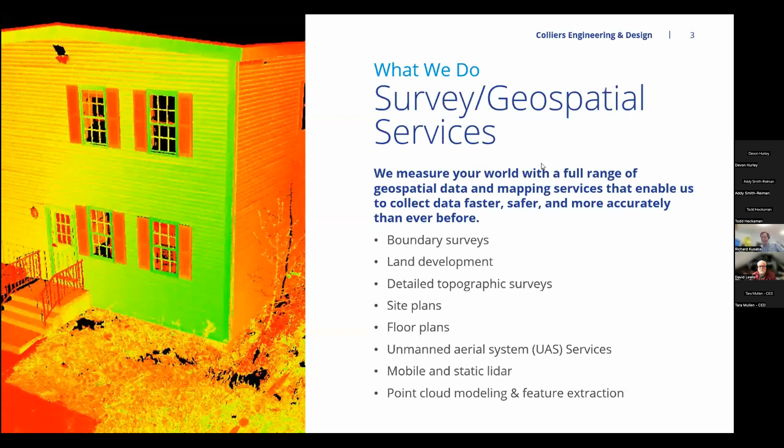We're all surveyors and we have a good understanding of boundary law and survey control, but it goes a little bit beyond the flat two-dimensional plans now, and goes a little bit more out.

Our survey approach uses pretty much every tool, and if there's a complicated spatial problem, we like those. We like to see what tool can we use for what job, and also what is an appropriate deliverable for you for this job?

Sometimes the best deliverable is a more simple plan, and sometimes the best deliverable is a much more complicated result, maybe a rendering, something like that. So we use all the tools to help our clients get where they need to go.

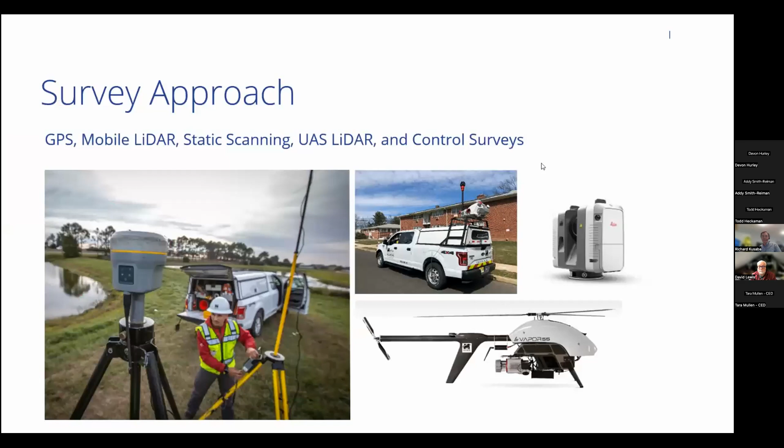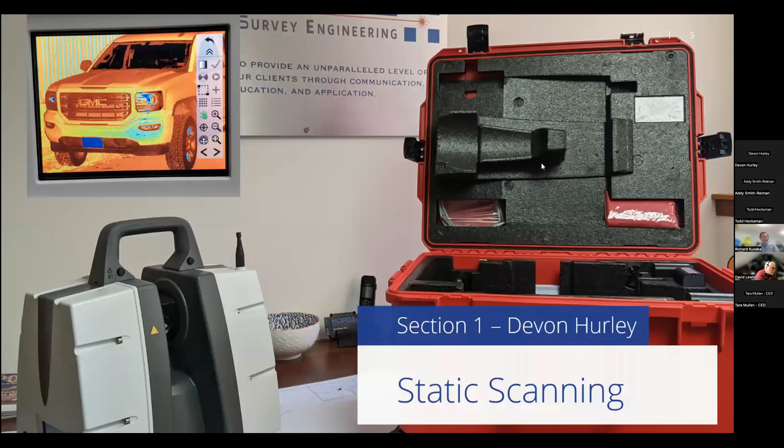The first thing we're going to talk about is static scanning, and I'm going to stop sharing. A coworker of mine, Devon Hurley, is going to take over and talk a little bit about static scanning and show the data from the brewery. So I will stop sharing.

Devon, I'm going to go ahead and mute myself because we sit next to each other. Gotcha, I'm going to try to share my screen here.

Can everybody see that? This is a blank screen right now, but... Yes. I was going to pull up what we did. Okay, yep, we can see it. Thanks.

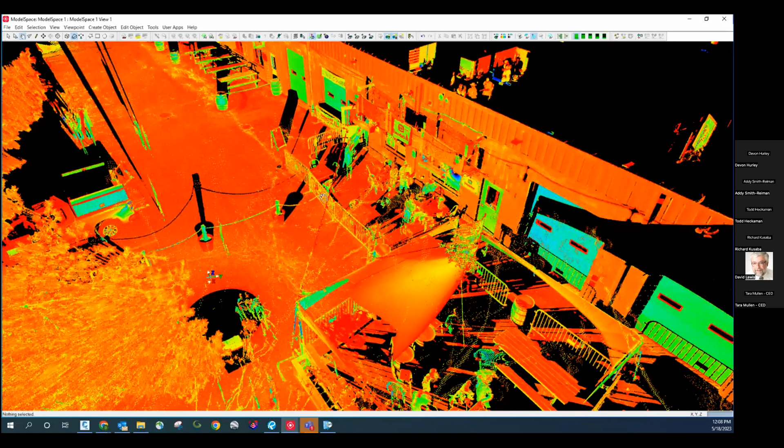Cool, yeah, so this was the first scan that we did, which was just of the exterior of the brewery. I just did it from one setup, but wanted to give you guys an idea of the level of detail that we're able to get from these things. You can see, obviously you can make out that text, but really the face of the building, you can see the grooves in every one of the, not really bricks, but whatever you'd call the face of that building.

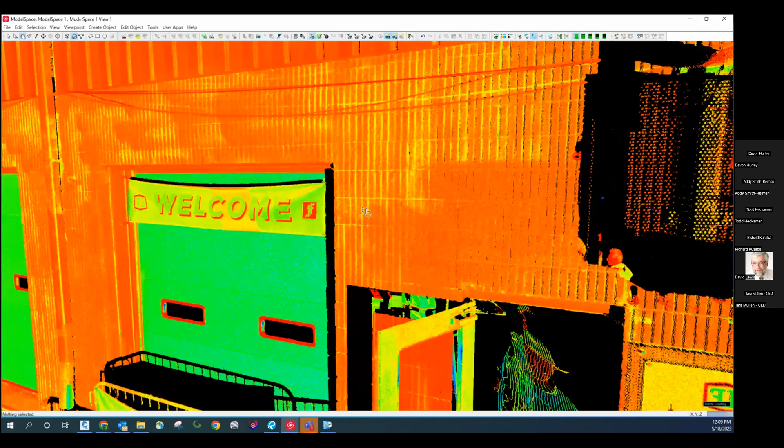I had this cranked up to about 50% of what we're capable of with it, so we can get as much detail as you would ever need. In most situations, we end up dumbing down the point cloud to get an average spacing of about 1/10 of a foot, just to make it more manageable from a data perspective. But that's basically a picture in terms of the amount of detail you get from it.

The door was open, so you can see where people were drinking beer at the bar and stuff.

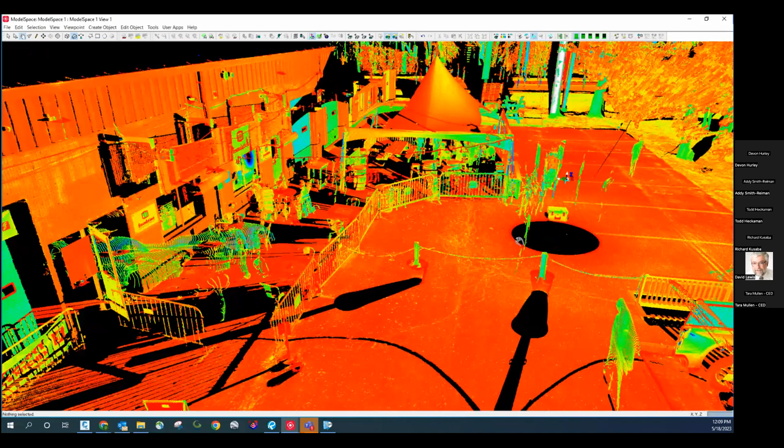A lot of times we take this point cloud and try to extract it using Revit models or whatever, basically to take the face of the building—extract the face of the building from the point cloud and things like that. As an example, I just took this tree. You can create a cylinder from it, so now you're actually creating this object three-dimensionally.

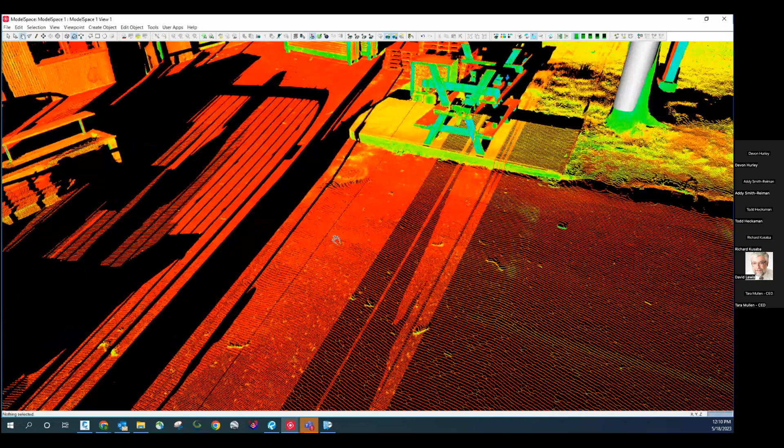Just to show you what we have to do—this was just one scan, but in general we do multiple scans, and we basically have to stitch them all together.

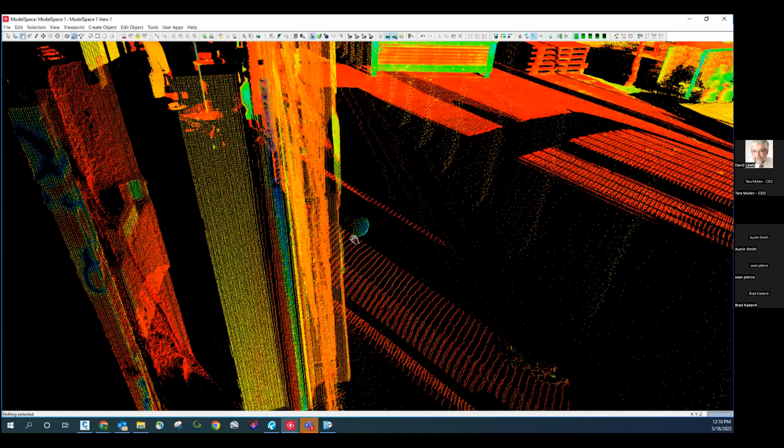The way we do that is you have to have common targets that are visible from all the different scans. Just a fun fact, this is actually a sphere, and we know exactly what the radius is, so the system automatically picks that up and knows that's a target. It just has a magnet on the side, so I attach it to the building right there. There's a few of them that I placed around, including this one down here.

So that's kind of the deal from this scan. And something else you can do that's kind of cool...

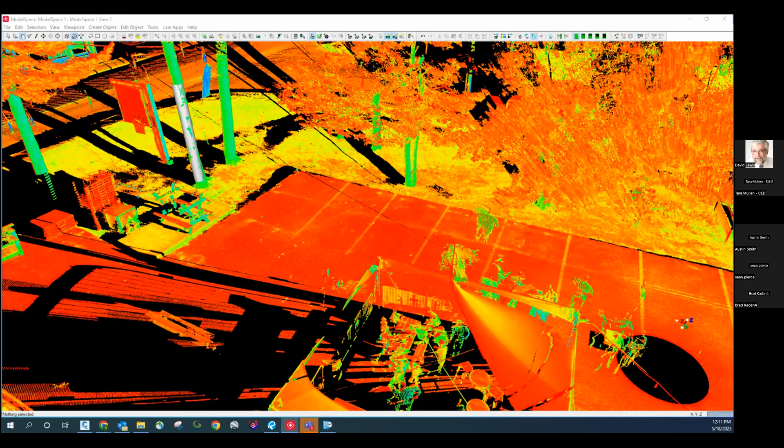You can change the way that you view the object, the point cloud. I'd forgotten to take pictures with this one when we did it, but you can change the view—the colors are based on the intensity of the return.

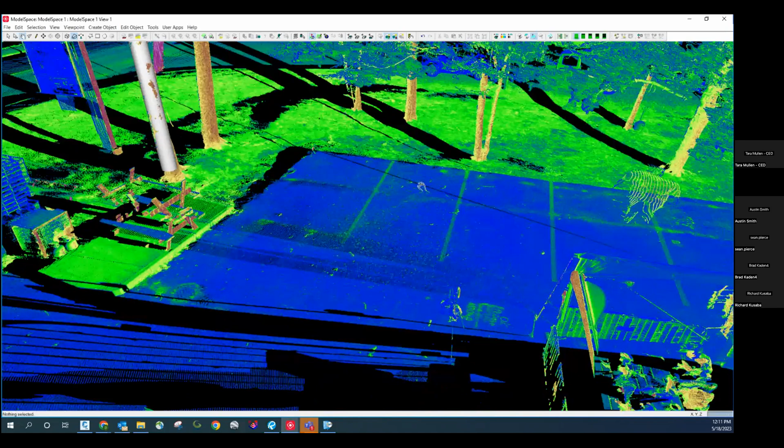It really gives you an idea—the different colors reflect differently. You can see the grass looks a certain way, and you can make out those pavement paint lines. You can see somebody had painted something over here. That just kind of gives you an idea.

And then we scanned the group instead of taking a picture. We scanned everybody in, and Logan started over here, then while I was scanning he ran to the other side, so he's in there twice. But yeah, just kind of a cool thing.

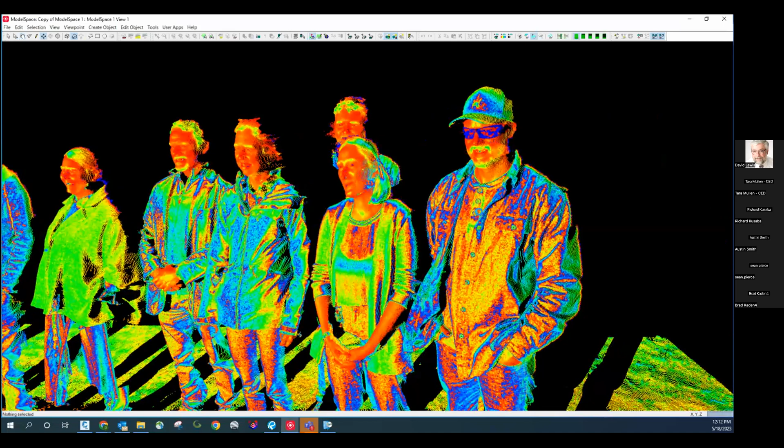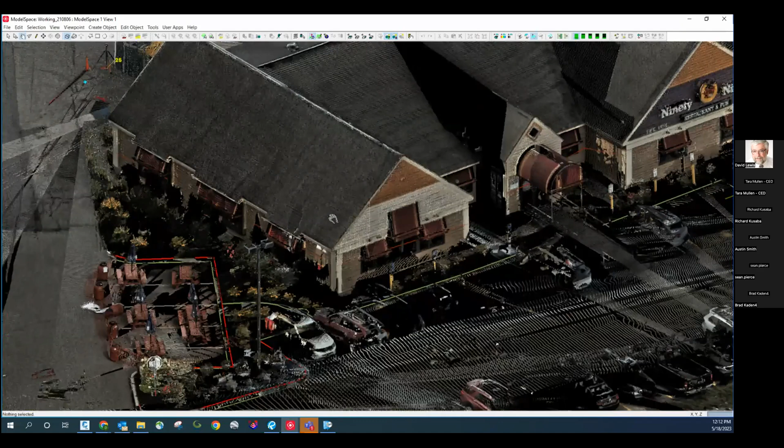Pretty cool stuff. Since I forgot to take pictures, I figured I could grab another scan job that we did, so you can see what it looks like. We scanned the 99 in Augusta, and we took full pictures with all this, so you can actually make out exactly what everything looks like on the site.

Again, the purpose of what we were doing here was the exterior existing condition survey, but normally this isn't something we'd care about—all this data is in here, and the level of detail we have is pretty impressive.

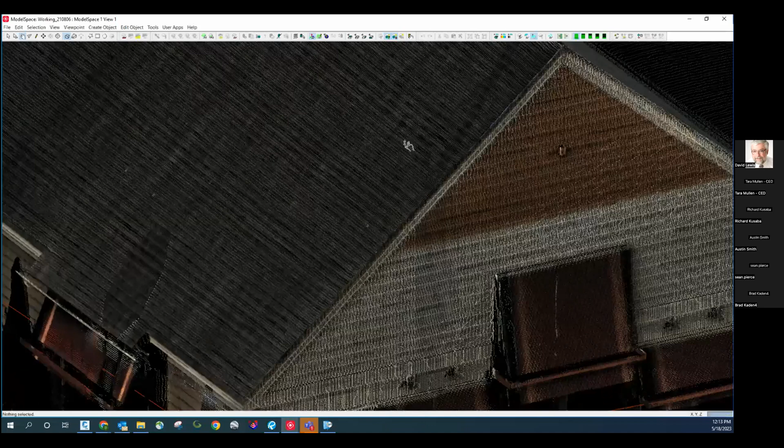And the shared parking lot with the hotel—again, this was not what we were doing, but just because we scanned it, you can see everything.

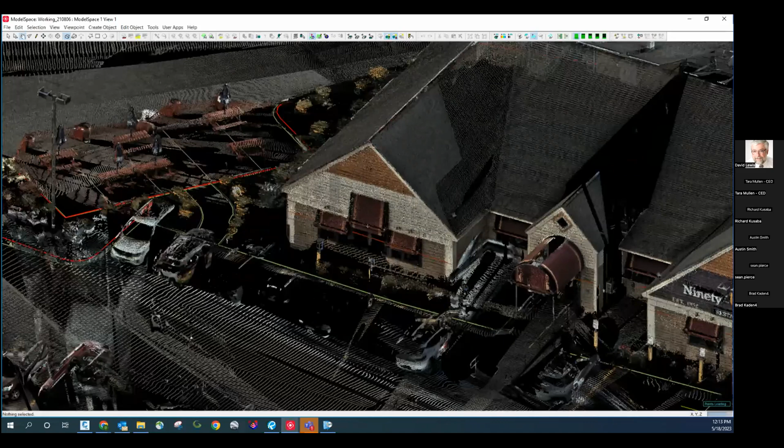Yeah, that's kind of the examples that I have. I'll probably stop sharing now unless anybody has any questions.

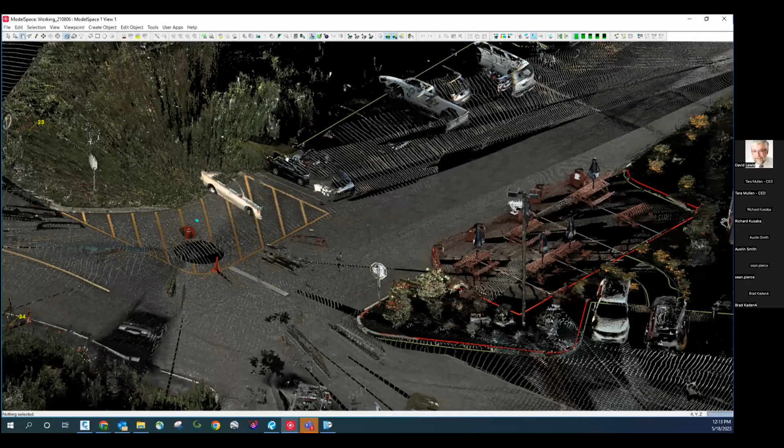Okay, so I wanted to show some before and after. That's just the raw data. We process it, do the survey control, show the targets from every position, and I just wanted to show an example of what it looks like after it gets modeled.

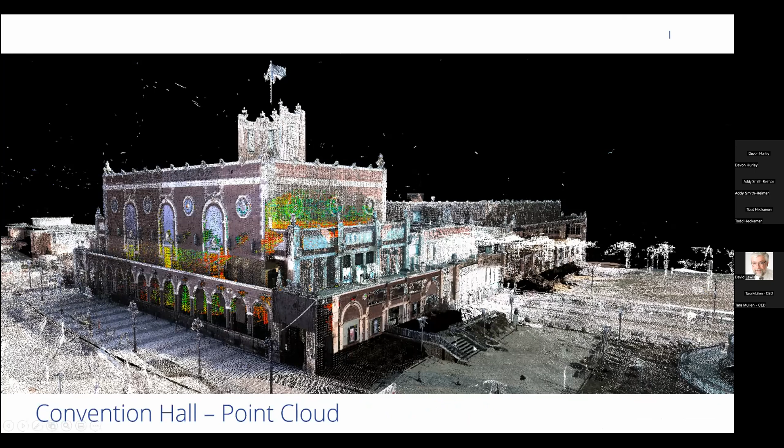So this is another project our company did. This is a photo of the exterior of the building. This is the colorized point cloud. You can see this one was done with intensity return, which is like the bright colors, and each pixel gets a photo or color assigned to it. Then this is what it looks like as it's been modeled. So you can see that's a photo of the front, the raw point cloud, and then the model.

How detailed the model is comes down to the level of detail for the scope of modeling. Because the more you model, the more you add. So that is kind of a simpler model, but it does show the level of detail. I think it's cool to see it go from photo to point cloud to model.

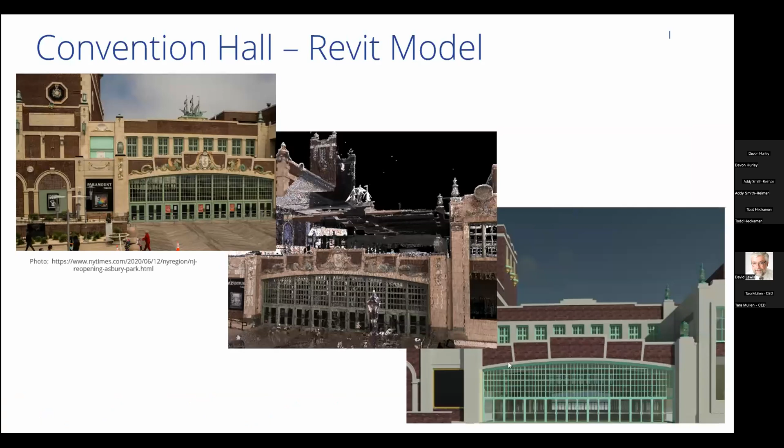Next, Richard Kusaba from our office is going to talk about the UAV aspect of it. So I'm going to stop sharing and let him jump on.

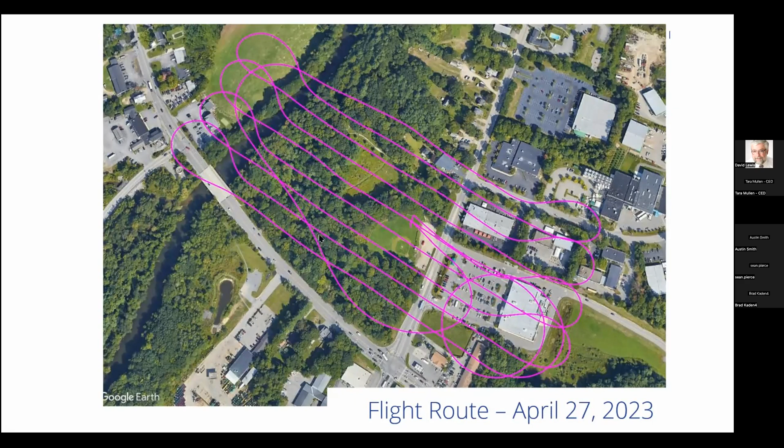For those who were there, that was a very quick flight, and they took care of it. So while you were there, you got to see both the terrestrial data that we were able to collect - very, very detailed stuff at the building level, at the interpersonal level - and we can also grab data from up above on a broad scale. Even on that broad scale, we still get some three-dimensional because we have our oblique photos. So yeah, it's a matter of using the right tool for the right job, and we have a full tool chest to work with.

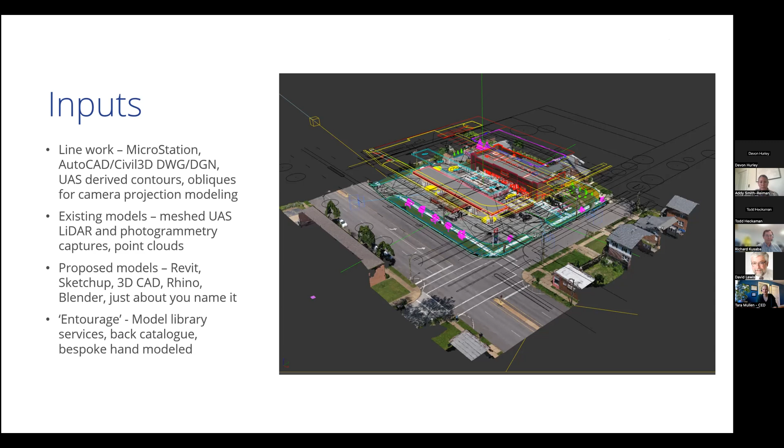PhotoSims is a really large part of some of the stuff that I do, especially more recently too. So you can consider them before-and-after, comparing photographed and proposed states, with precision still or video camera matching, ground or air. You're saying here's an existing state, here's the proposed state over the exact same camera properties, so that it appears to sit right on top of the photo. You barely have to describe what it is - you can just look at it and see what it is basically.

A lot of approvals are based on this - the town board, the neighbors are concerned about a project, they want to see what it's going to look like across their driveway in a lot of cases. It's kind of a high fidelity mixed reality. If you think of augmented reality, like the HoloLens, you look through this kind of goggle and overlay 3D onto that. This is almost like that, only we're in a single still frame, one single photo for one single specific place, but you can get a nice high fidelity out of it.

I should probably get that out of the way. Sorry if that was distracting, guys.

So then looking at some of these examples, up here we've got a Circle K that was getting demolished and replaced entirely. So there's that existing photo, and then the proposed is the 3D model - that's a Revit model that came in with some of that entourage I used from Chaos, in my case Chaos Cosmos, trees and cars and such.

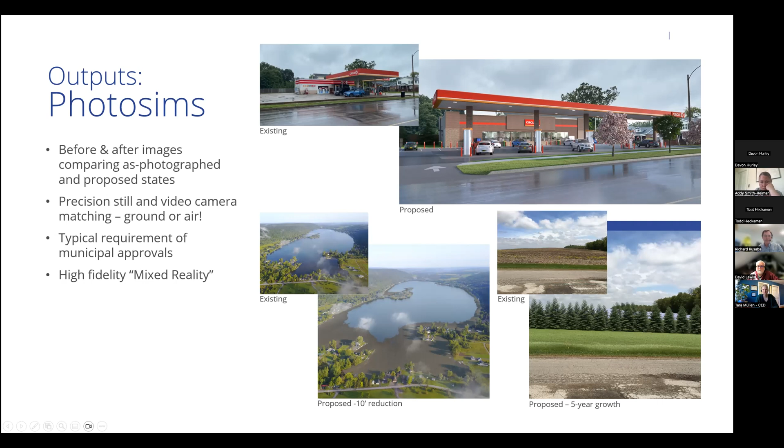So that's one kind of output, PhotoSims, a big one, and then moving into real-time simulations. So when I spoke about using Unity, that's a game engine that you can custom build, bring in models, C# code your own interface menus, and a lot of stuff can go on there.

But we do have a great example of that, which I could share the actual model with in a minute here, of a roundabout project. There's the existing, it's that whole existing-proposed thing happening, and being able to flip between the two. And this is actually just a Phantom, it wasn't a super fancy drone, but it's amazing even at that level you can get such a cool result.

And for the viz, it's not engineering grade. A lot of what those really dense point clouds that are required to accurately model as-built and do all that stuff is incredibly useful, but just even that meshed output of the result is really useful on the viz side.

Bring an entire environment in, like boink, there it is. And I had to treat this a little bit extra. You can see it's very evenly tessellated and sort of quadified, which is what you'd like to see for graphics cards.

I'd like to see that because the guy running this was on a decent laptop, but it needed to be kind of resurfaced and retopologized a little bit for it to run correctly for them. So there was some pre-processing there, but for people who have high power graphics cards like I do, it's really neat to bring stuff in and just have it be there. Super cool stuff, but yeah, underlying game technology.

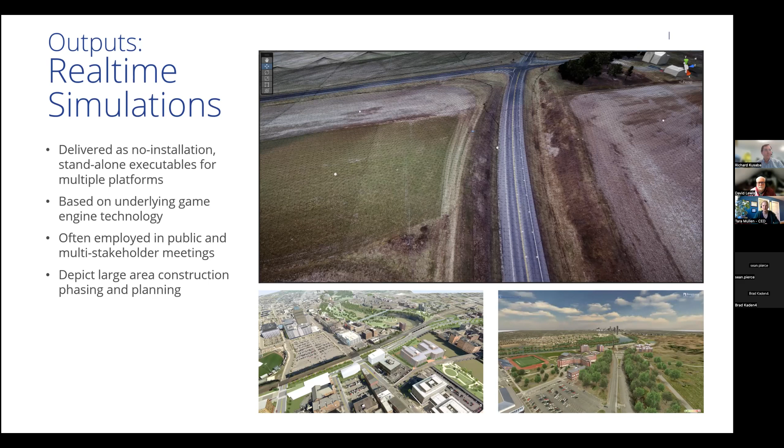That was actually my last slide as far as slides go, and I wanted to jump into some of these models. If I were to back it up, there we can actually jump into this model. Let me flip, if I can get us in the right one. I've got a few windows open, guys.

So this is actually the mesh data in combination with the Revit model data coming in to create the photosims that we used to present. It was actually the golf club, a rather prestigious golf course and club. People were very, very interested in how this would look on site, so it was very important to come in with some good and accurate looking shots.

This is actual direct drone scan data that came in from, and this was some years ago, I forget if it was Pix4D or Context Capture, but it was one of the meshification, drone data processing software packages. One of the outputs is a tessellated mesh like this, textured as well, so you actually get the textures on here.

Oh, not the model, sorry guys. Yeah, well, this is a new Zoom thing for me. Maybe I'm going to have to do a different screen share type thing. Let me shut that down. Oh, so maybe this isn't the... I'm used to the whole window being shared, and then I just alt tab. Sorry about that.

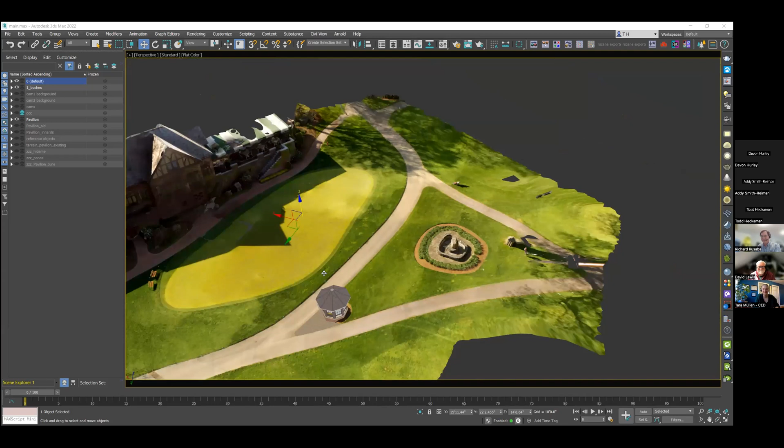So yeah, this was the model that I was just previously talking about. The drone scan, it's this entire kind of monster, and you could see the Revit component that came in was the actual design. This is actually interesting because there's a bush, and you can kind of see where the edge of the grass is.

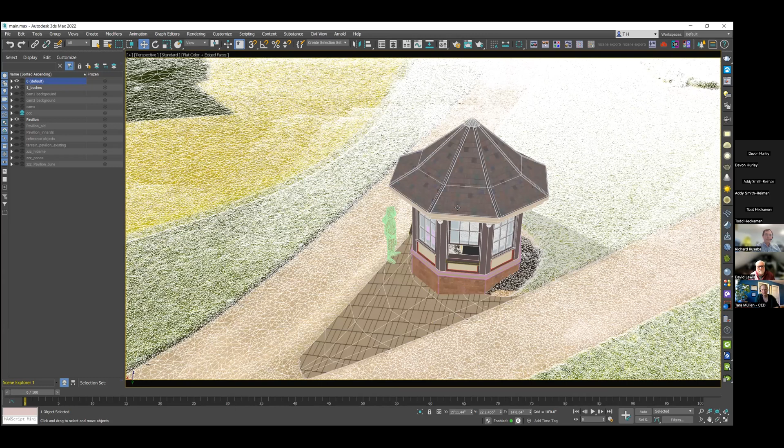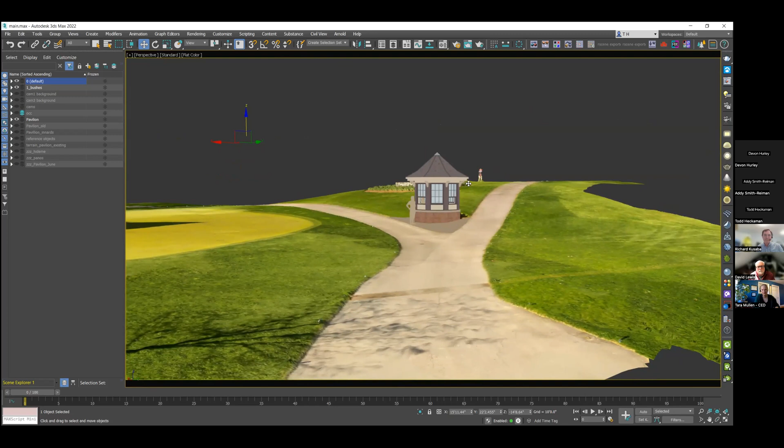There's another kind of feature here that they were replacing with this other little tiny building used for golf, and it's right at the literal fork in the road where you decide which course you want to go to. So they pick up their pencil, do whatever at the little pavilion, and then go on to the course. I just noticed that I'm in the scan.

Here I am over here actually flying this thing, it's always fun when you see yourself in these things. But I don't have to re-talk about what I was already saying, because it was obviously very important to get this all photo simmed up for the club members.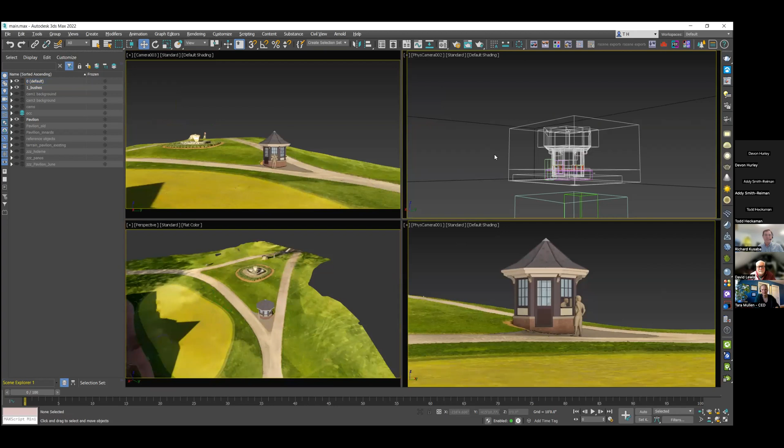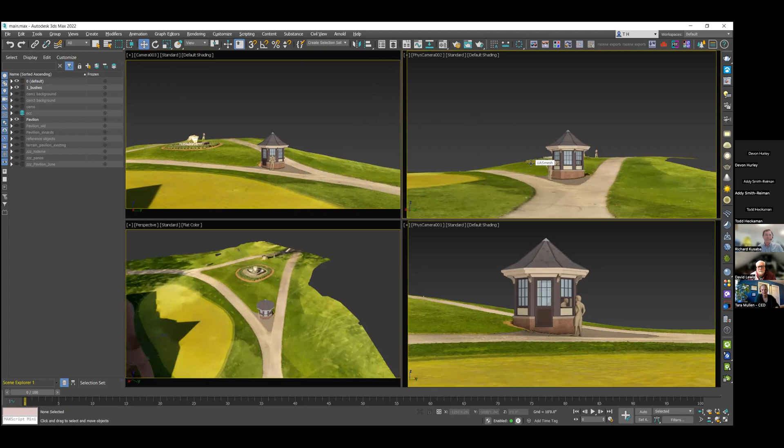So then I would put in Photoshop the actual photographs that were taken that kind of match generally the shots. You can kind of tell here we're up at some kind of deck or balcony, an accurate shot for us, and we were able to come in and photo match those all. These are all kind of cameras that are in the 3D scene, so that I would render separately and photo match them to the background photo.

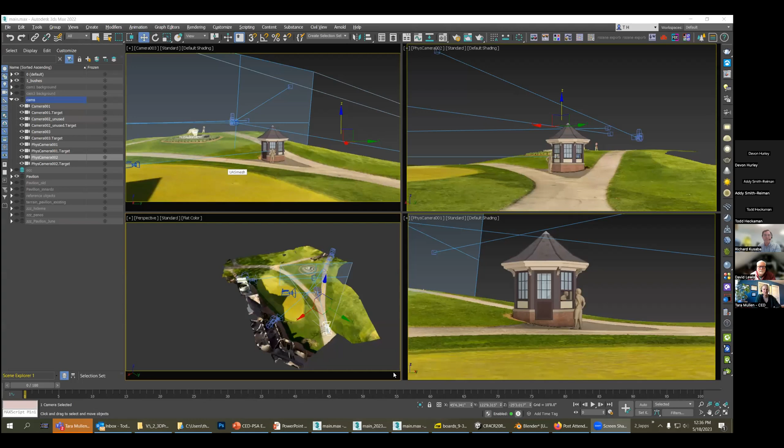Now, unfortunately, this model, when I went to crack it open this morning, was crashing on me, and it's from a previous version of 3ds Max. So I had to scramble a little bit to basically reassemble it for you guys. But the overall vibe of it is, and I think I can still flip back to...

You guys see the presentation? Yes. Yes. Okay, yeah, so I'm kind of free to move about now. That's just kind of what's going for.

So that right there is the fully assembled scene where you can see the CAD file is in there. The point cloud is surrounding. You can see right there the camera that was actually used for that render, all assembled in the file.

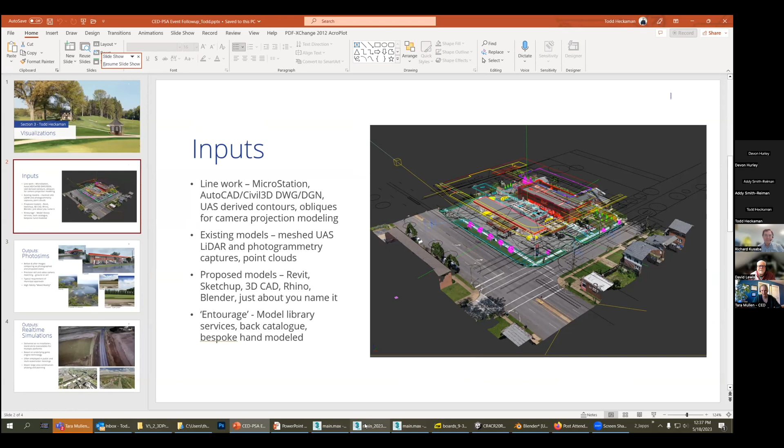Generally, once we're in here, you can get a vibe for how, even this is point cloud, this is points, just like we were seeing earlier. I was able to, and this isn't a perfect match because I did have to scramble to get this thing in here this morning, just for our example.

If you picture this all actually having been lined up, that pole would be right here, the corner would be the corner. It would help me when I'm actually manipulating the camera in another view.

And there's that camera that's actually used for the photo sim. I can come in there and go, if you look at the bottom right screen, okay, right about there, and then just kind of squeeze things around after having initially matched the sensor size and the lens focal length. Those are the two primary things, but usually there's a little bit of fudging around to get to the right spot.

And I got to say, it was super helpful to get that UAS data in here as an augmentation to my camera matching process. And that was really super handy for that project that we were looking at before.

And then to zoom over to some of the solar stuff. So this is a solar project in New York, and this is kind of an example of some of the contours getting used for viz. So in this case, it's forming the terrain and the 3D mesh that I'm going to, again, we're photo simming here.

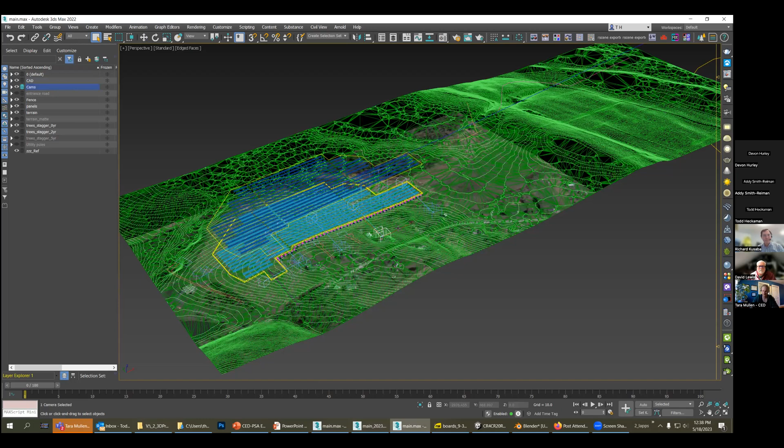So I've got cameras laid down where some of these people's actual properties were, and in some cases they actually gave us the photo, and the town, everyone agreed that okay, we'll photo match from your photo. So there's some that are on people's decks. Yeah, that's one that was actually on the back of someone's deck.

So this goes into that very important terrain model for this, to where I can actually come in and put a camera on the ground, put it 5 feet above the ground, 5 feet 5 inches, the average human height or whatnot, and start with a very close proximity of what is a good camera match.

And then maybe there's a little slide around a little bit, get her right about in there, and yeah, boom, you got it. And then at that point, this camera is locked to the background, and any kind of 3D modeling or whatever I'm doing in here just becomes locked into the perspective of this camera.

I've done these with close proximity ones, like it's really close to this person's yard. But we've also been asked to take shots like miles and miles away just to confirm that you won't show anything. And I've literally rendered a solar farm at the top of a peak of the side of a hill, and that goes into the whole package that everyone checks out at the end.

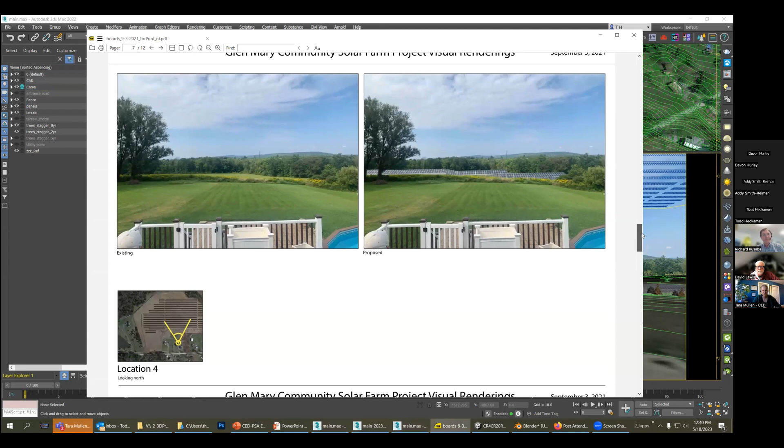And a little example of that is the end result of some of those. So there's that guy's deck with his view of what the project's going to be, and of course the concern there being, ooh, that's a lot of solar farms.

So you come in and say, oh well, we can provide screen trees, and by the way, here's what they would look like when they're planted. In 5 years, they're going to look like this, and this all goes into satisfying the public that this project is visually acceptable, impact-wise.

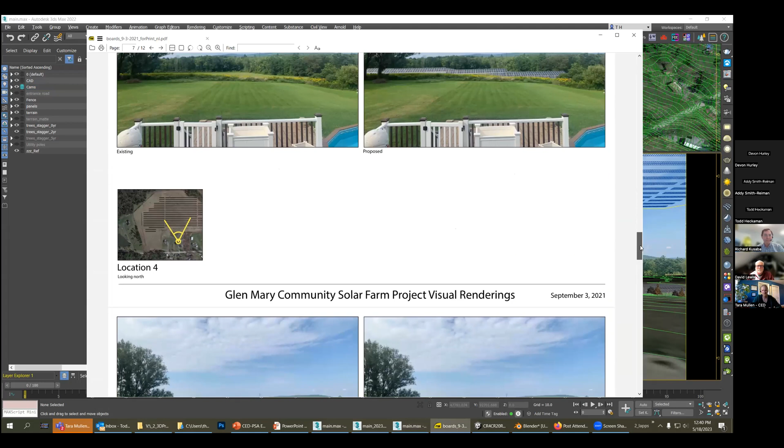So it's something that you tend to see a lot. And actually, I think I really nailed the time. One of the last things we got to get into quick here, since we're at 12:40 already, is the real-time model stuff.

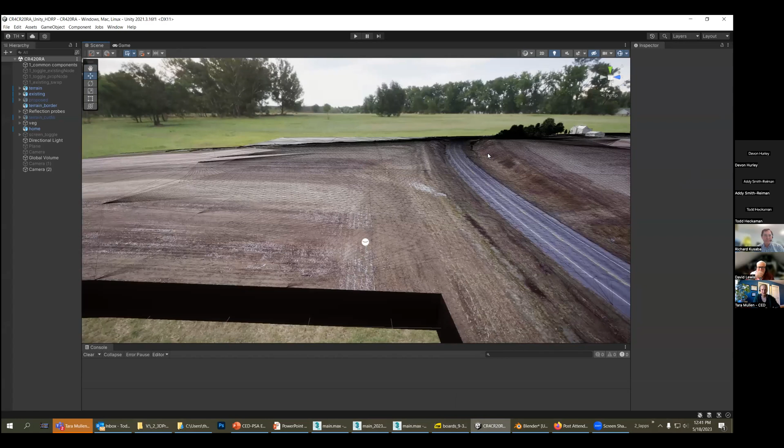This is another example of an actual UAV scan. This is the full scan we've got here, and putting wireframe on it kind of helps with the existing condition. This is an existing site that was used to present a proposed condition. You can see a lot of what people are concerned about as you come in down the road. This terrain is making it hard to see.

Oh, there's a roundabout. So basically the only reason people would know there's a roundabout coming up is the signage that's there. They use this to map out, hey, alert, and these will actually flash, and they'll show flashing lights. Coming from the other side there was a cool idea one of the guys had, and I'll flip it. When they're actually presenting with folks, I made a little button they can just flip quickly, but here, for what we're doing, I'll just do it manually.

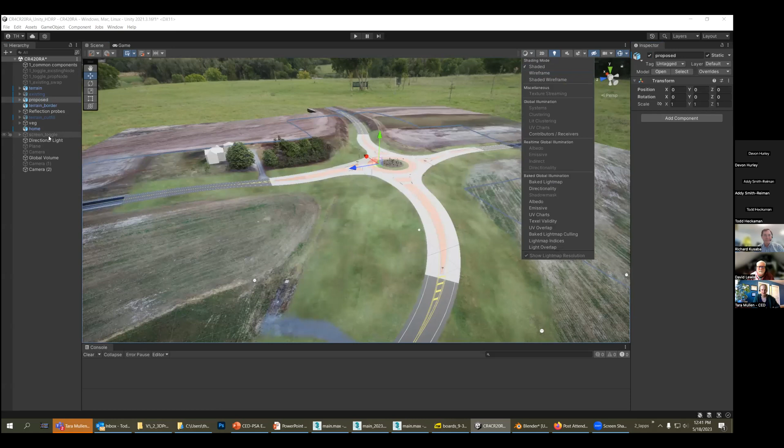So they would push a button and it would flip on the proposed state. They additionally proposed a little bit of landscape here, and I think this is such a cool idea. As you're approaching from this side, you're getting a warning, so someone coming up will see that straight ahead of the road, and maybe the thought is they're paying a little more attention, maybe it's an additional cue to get off your phone and take a look at what's happening ahead. So the thought was to prompt them into paying more attention in addition to the signs. I thought that was a cool idea, because it's literally straight down the road - if that road didn't bend, you might think you're heading for those trees. I thought that was pretty neat.

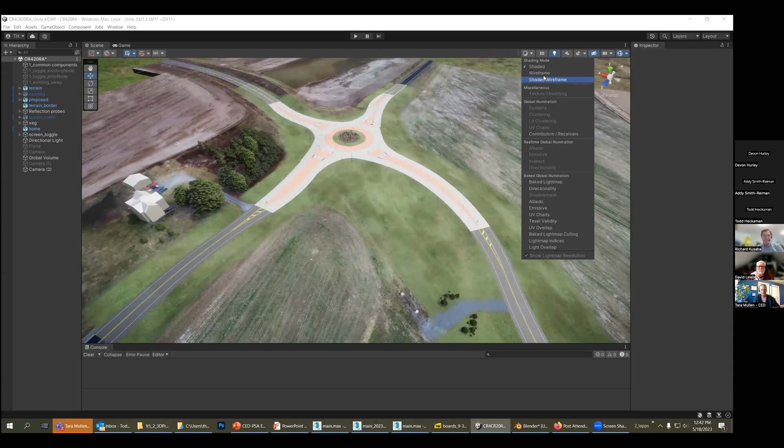But yeah, this entire thing was based off of a UAS scan. This is Bentley MicroStation, which happened to be used for the proposed portions, and then we just flipped - I stitched in the old stuff where the new stuff happened.

Another cool thing with the UAS is the resolution of the ortho photos and aerials you get. It's super cool when you're building something like this and you're going to fly around and be very close to it, to have the mesh texture at such a high level - that's really helpful. Even for stuff like dropping an existing stop sign down, I could literally see where the stop sign was and put it there. It's been super handy so far.

I probably have one more thing, just really quickly, about using ortho photos to projection-model in 3D. This is something you might want to Google further in your own time - it might help separately for creating buildings on the periphery of your projects. High-res aerials can actually be used, in a more traditional photogrammetry way, to build out some of the geometry. Again, this is for viz, for populating surroundings - I don't think anyone's going to come in and use this model as an engineering grade basis or anything.

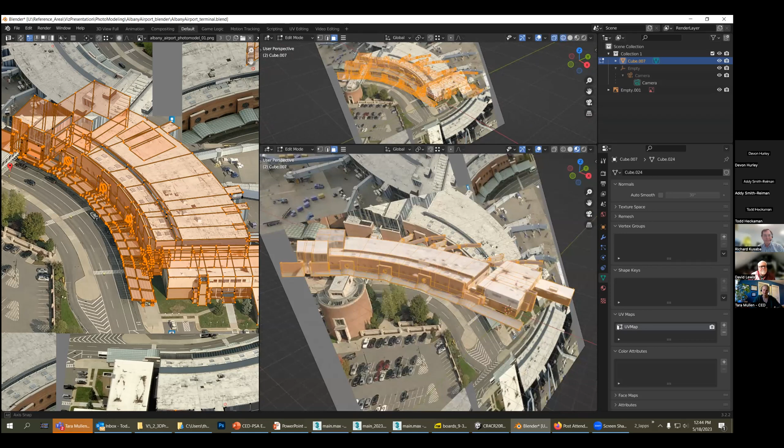But for purposes of this, certainly those obliques you get, really high-res obliques, are really cool for doing stuff like that. Then you extract that building out of there, and now you've got this textured building of what was projected onto the background. So we'll leave it at that, and I think that should wrap it up for me.